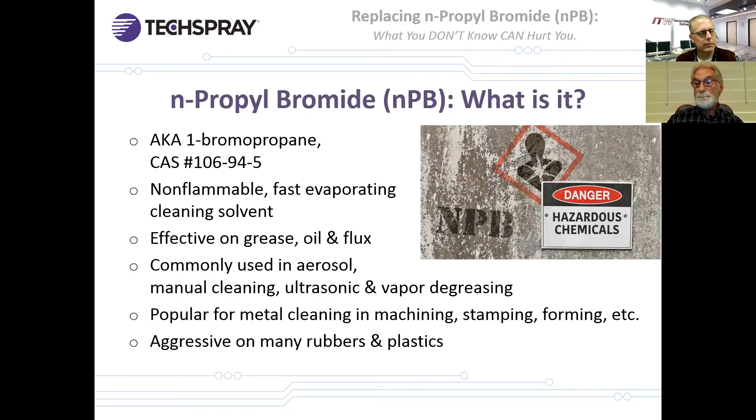Okay, so why do people use nPB? Well, a little history. About 30 years ago or so, Freon 113 or CFC 113 was used everywhere, and it cleaned everything. It was non-flammable, plastic safe, and it was a very powerful cleaner. As time went on, they also found, unfortunately, that it depleted the ozone, which was a big deal a number of years ago. And so the CFCs, or the chlorofluorocarbons, as a class, were the first group to be listed as ozone depleting substances by the EPA. And the CFCs were therefore banned and prohibited from use in 1994.

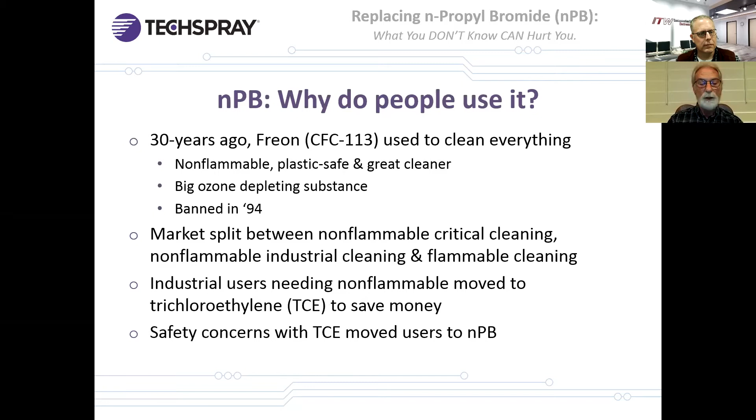At that point, the market split. It split into non-flammable critical cleaning, non-flammable industrial cleaning segments, and of course the flammable cleaning areas. The non-flammable industrial users eventually made the move to TCE down the road due to cost. And then later on, many of these TCE users switched to N-propyl bromide due to the safety and environmental issues that were then known to be associated with TCE.

Okay, problems did emerge with nPB. In 2007, the EPA approved nPB with certain use conditions for metal cleaning, electronic cleaning, and precision cleaning. These were under the SNAP rules. If you're not familiar with SNAP, it's actually a caveat of the Clean Air Act, and it stands for the Significant New Alternatives Policy Program.

So, as with most things, the more we use it, the more we learn about it, and nPB was no exception. It was widely marketed as a safety solvent, and it was used in almost every imaginable type of cleaning method. Now, as time went on, further studies showed it to be a carcinogen or a potential carcinogen, along with negative effects on neurological and some reproductive systems.

Now, back in the day, it was somewhat common to hear complaints ranging from headaches to short-term memory loss to motor function degradation over the short term. And this was seen to be very common in vapor degreasing operations, as well as many adhesive applications where they used nPB as a carrier solvent.

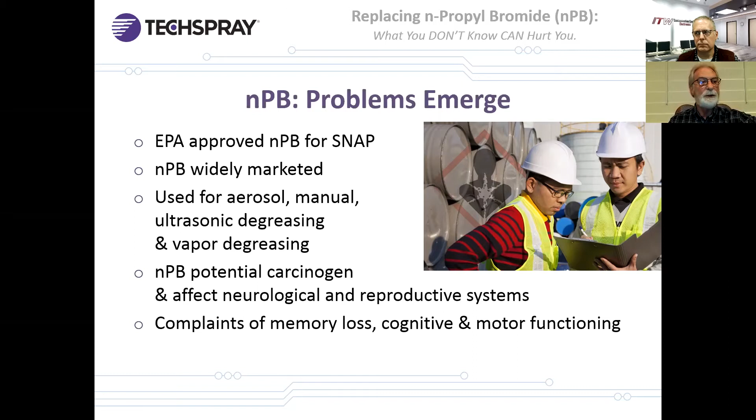Okay, let's learn a little bit about toxicity and how that toxicity is expressed in the different forms of documentation that you'll see. On an SDS, the safety data sheet, you'll see a variety of abbreviations: OEL, PEL, REL, TLV, TWA, OSHA, ACGIH. Don't let all these abbreviations scare you. There's a ton of agencies that study these materials and express the limits with different nomenclatures. And we'll go over some of these shortly.

OEL is occupational exposure limit. PEL is permissible exposure limit. Essentially the same, different agencies just use different abbreviations to express that. REL is recommended exposure limit. You'll see that mostly by the manufacturer of the products in the absence of other data, especially when the product is new to the market. They will put their own recommended limits on it.

TLV, threshold limit value, that's the top limit that you cannot exceed. TWA is a time-weighted average. That's usually for an 8-hour period, which coincidentally is the usual length of a work shift.

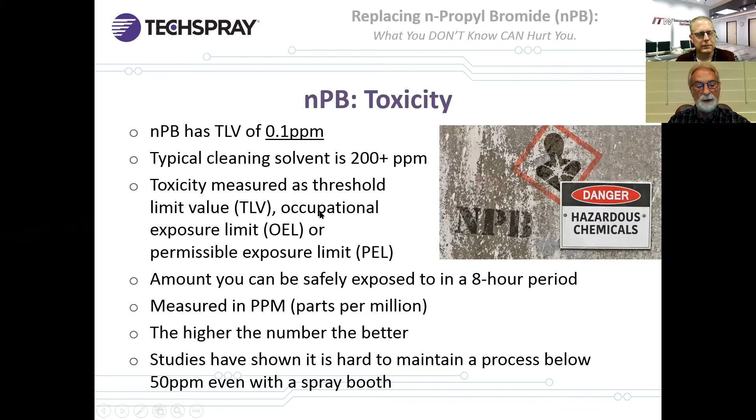But what about that last bullet, though? That actually is an important one. Well, yeah. In many of the processes by regulation, and especially in different state regulations, it's hard to get down and maintain your process below 50 parts per million, even with vent hoods, spray booths with extreme ventilation. So if the limit or recommended limit is 0.1 ppm, and you can't even maintain 50 ppm, then you're probably way out of bounds for your operators and any bystanders. Sorry, I skipped that part.

Oh, no problem. Okay. Now, as I said, this may all change very soon. In August of this past year, the EPA released a non-technical risk evaluation of N-propyl bromide in various applications. They evaluated nPB in 25 different use conditions. And out of that 25, they found 16 different specific use conditions where nPB was used that presents an unreasonable risk of injury. Not my words, that's their words, an unreasonable risk of injury.

So now they further separated these into 9 industrial and commercial uses and 7 consumer uses. Now, among all of these industrial and commercial uses of nPB, there's just common cleaning and degreasing methods, including vapor degreasing like open top, inline, closed loop systems, cold cleaning methods, and aerosol uses. Automotive degreasers such as engine degreasers and brake cleaners containing nPB were also among this list. And the list goes on. It's a pretty significant list.

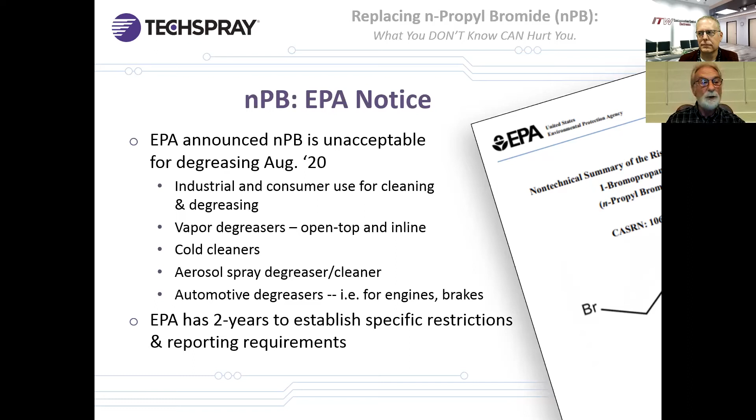So just my guess, and this is just me talking off the cuff, my guess is that once this happens, you're going to see some revision of the SNAP rules and the restrictions on the use conditions regarding nPB, and perhaps even some modification of the Clean Air Act itself. So that may be coming within the next 2 years. Okay.

Okay, so where do you go from here? Are you considering replacing nPB in some of your processes? How are you going to set up the evaluation and that decision-making process when you're looking at a variety of replacement chemistries? Well, hey, you're in luck. We're going to give you some guidelines based on our experience on how to go about this.

Now, you may find that you need to modify our techniques and recommendations somewhat to fit your specific process and situation, and that's okay. But what follows are the guidelines that we employ, and they just may not be right for everyone, but it will give you an idea of how to organize your procedures.

So what are the target parameters that you want to consider for evaluation? Well, some of these include just what's listed here. The method of application, toxicity and emission values, the flammability of the product, materials compatibility, other specifications that you come up with that you need to review and evaluate, and of course, performance. And last but not least, cost. Cost will always be a factor.

Now, this may or may not be your primary concern, but it is our suggestion that you consider cost lastly. And the only reason I say that is because we've seen a number of times where a customer, during his evaluation process, has written off a number of competing products just due to cost. Well, eventually they find themselves boxed into a corner with no replacement chemistries.

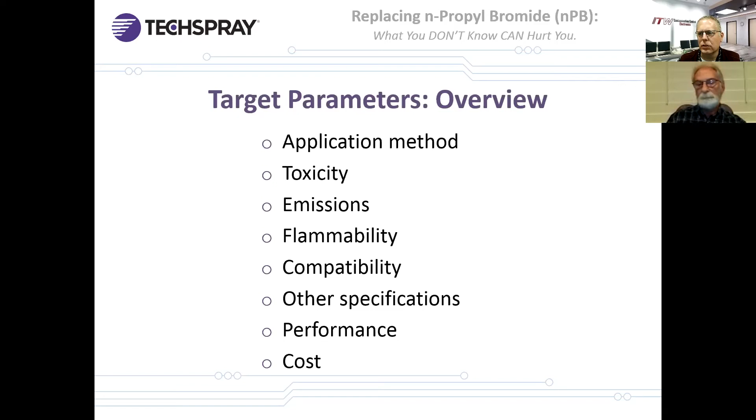Okay, so starting out, hopefully you can see that. Okay, so we've got a form here. Piers, can you see that? Yes. Okay, just making sure.

So you have a form here. It's a specification form. The idea here is you get with your chemical supplier, let's say your current chemical supplier, and you need to get the specs of what you're currently using unless you have that already. And the key to this is you go to either your current supplier or other suppliers. They need to understand what you're currently using. That's the default, sort of the baseline that they're going to be going off of.

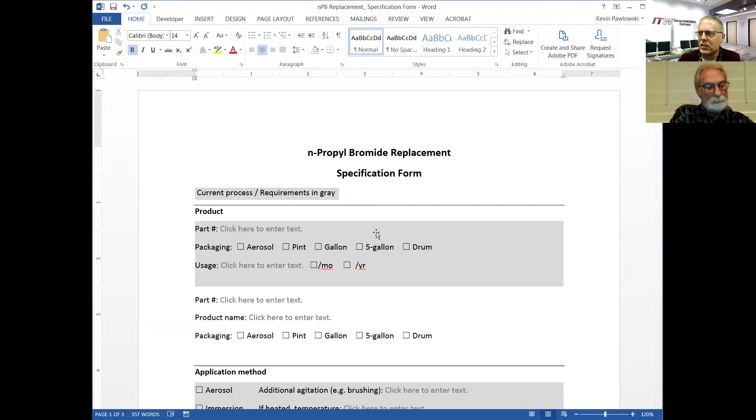And so this form gives you a way to do that without playing 20 questions, going back and forth 20 times before you finally get to it. So you can get this to your current chemical supplier, have them fill out the gray areas. So that is your current specifications. And then you send it to another chemical supplier. Let's say you send it to us. We look at it and, okay, here is what you're using in terms of your product.

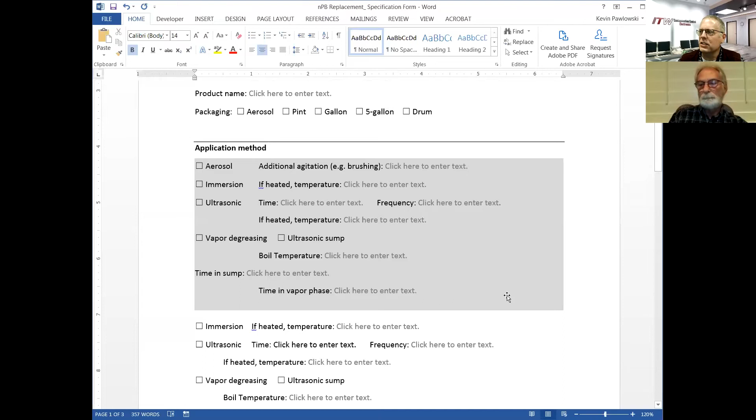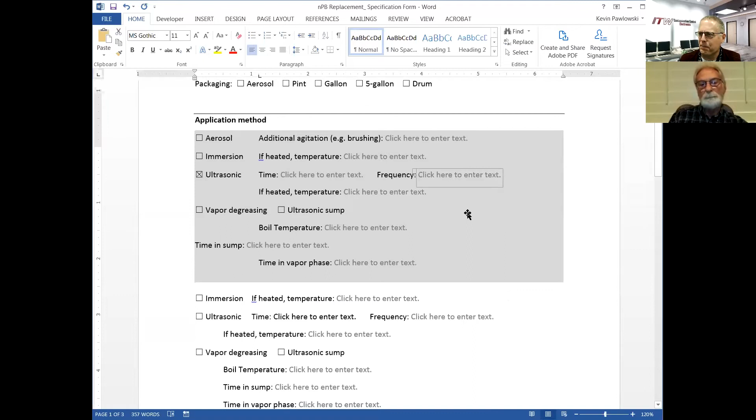Application method. The more we can understand, we may have other questions, but this will give us a good base information of what we're dealing with. And so what does your process look like? Well, here's some fill in the blanks. You can check things off and you can fill things in to make it really easy then for somebody to get back to you.

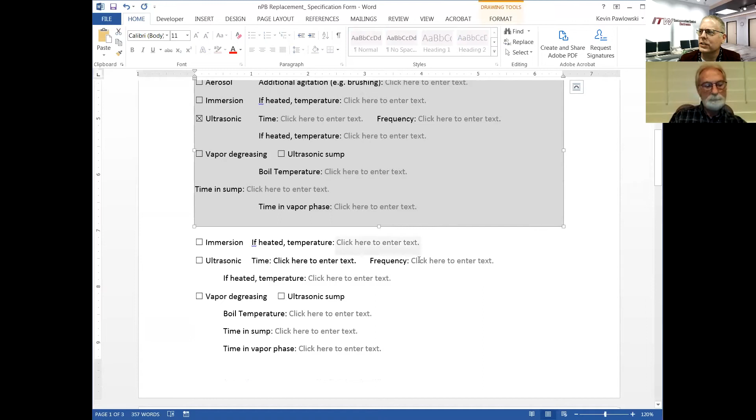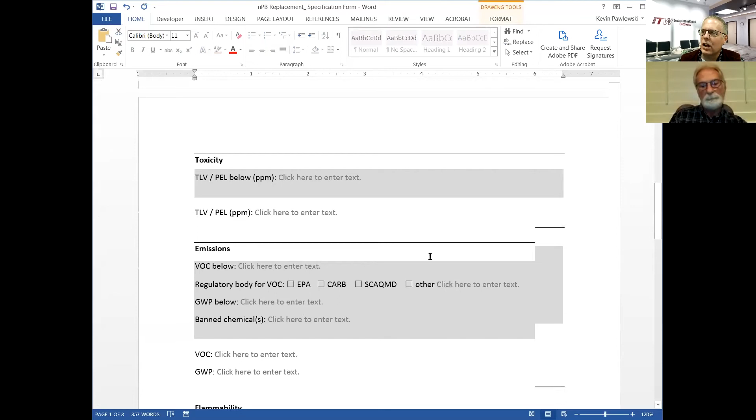Then have the supplier fill in the part in white. So you're going to supply them what's in gray, they fill in what's in white, and then when you're done, you've got their recommendations. So you can see it goes down to toxicity. It happens to follow the slide Piers just went through. So we're going to be taking you through step by step on that. And of course, ending in cost.

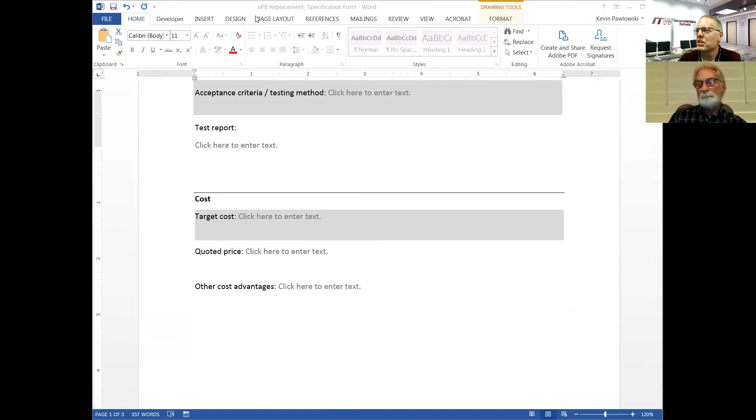And there is the opportunity to add other cost advantages because, as we all know, it's not always just dollars and cents. So then you get these back, let's say from 3 different suppliers. Then what you have is a worksheet. The worksheet is an Excel spreadsheet.

Okay, so most of you will know how to use Excel. You can make changes as needed. Add the product names that you want to add, fill in the blanks from the forms. And this will give you an opportunity to do a comparison study. So you've got all of these specifications across, and you can see them side by side, so you can decide which one works best for you.

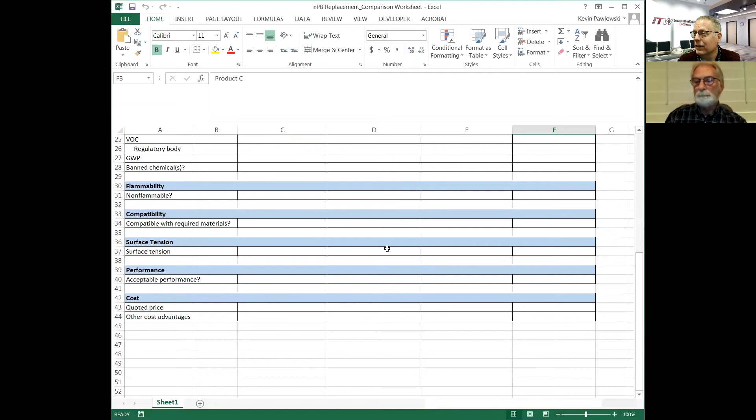So as Piers mentioned, you look at the quoted price. You can go to the lowest one as long as everything meets your acceptance criteria. So this column C is your current product, and if everything meets the same specifications, well, it should work in your process. So the idea is to really slick up the communication with your chemical suppliers. Okay, so let me get this back to the slide.

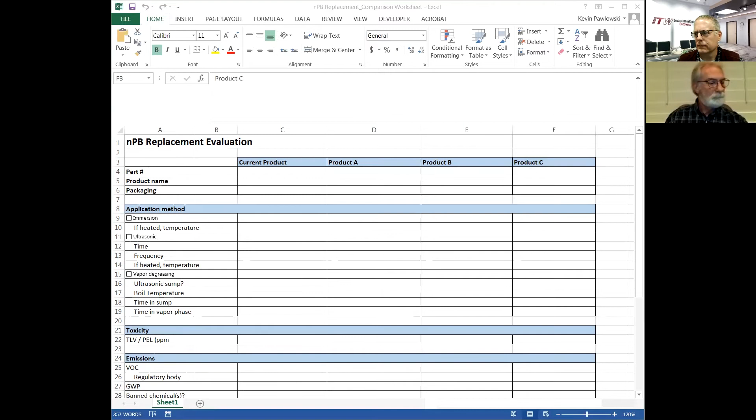All right, Piers, back to you. Okay. Just one second. Sorry. That's okay. Jumped ahead a little bit. All right. Okay, here we go.

Okay, so let's look at the various application methods that you may be currently using. Now, each of the replacement products that you're considering are going to have their own pros and cons, depending on how you employ those products. So here's a few things to consider on each, and we'll dive a little bit deeper on each one of these in the following sections.

So for vapor degreasing, you want to compare the various physical properties of the competing products. What are the different boiling points? How will these different boiling points help to remove the soils? Because you'll notice that in many of the ones, the newer formulas are typically going to be lower boiling points than nPB and some of the older methods.

What type of retrofit may be required for the new chemistry? Is the unit on its last legs? Is it worn out? Is it time for replacement? Is your unit compliant with the regulations in your state for all of the emission controls? You know, this could be the right time to either repair or replace your unit.

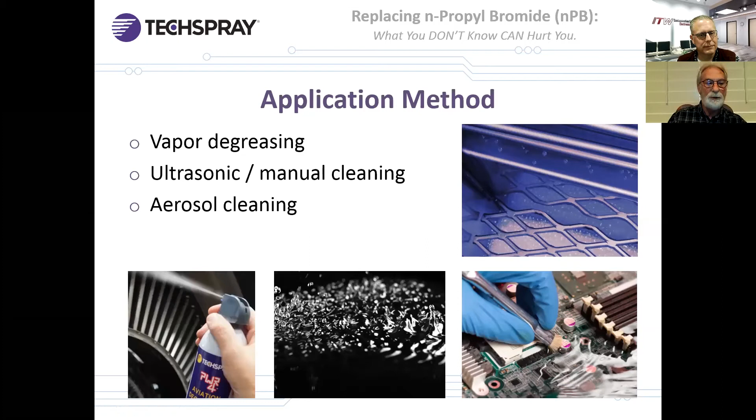Okay, now to go a little bit deeper into vapor degreasing. If you're not familiar with the process, and obviously a number of you are, but for those of you that are not, it's a closed loop system. Essentially it's a boil, reflux, and condensation loop that regenerates or condenses that solvent and then replenishes the section that provides the cleaning area, which in this case is the boil zone.

Now, the solvent chemistry should be an azeotrope or a near azeotrope in order to maintain constant or nearly constant composition and stability in both the liquid and the vapor phases. This is, number one, for safety and consistency in cleaning. For the typical application, non-flammable products should always be used in a vapor degreaser.

Now, compared to your current products, the boiling point will probably change in your replacement chemistries that are under consideration. In the newer chemistries that we typically see, the boiling points are generally lower. When switching to a new chemistry, it will be important to optimize your system to achieve the best performance values and to meet your cleaning requirements.

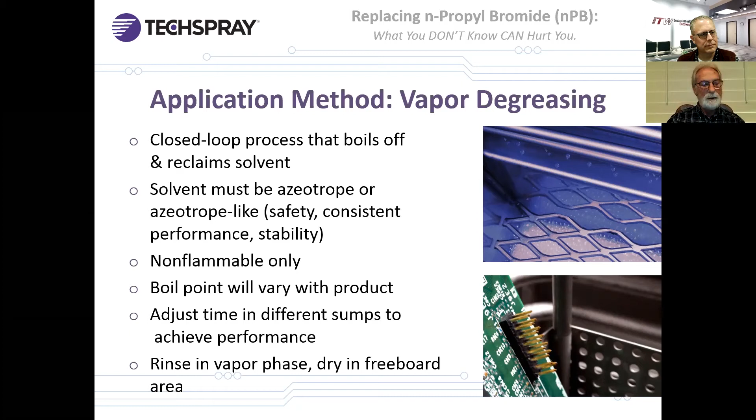So for ultrasonic cleaning now. For ultrasonics, we always recommend, again, using non-flammable solvents due to the possibility of emission escape that's really almost inherent in these types of units. Flammable emissions or vapors can escape, move around the area, and potentially come in contact with a heat source or an electrical source and cause ignition.

So for various chemistries that you've got under evaluation, you want to vary the dwell time in your testing. That way you can see the different results, and that will help you to optimize that process for the maximum cleaning performance and your throughput.

Adjusting the frequency usually is only going to be feasible by changing the model of the unit and/or its transducer. It's going to be much more difficult to change the transducer. It's really not an option. It can be done, but to safely and reliably change out the frequency, it's just easier to purchase a new model with a correct transducer in it.

You can consult with your equipment vendor, explain the parts that you're cleaning, as well as the chemistry that you're using, and they can help you choose the right transducer option or a different model with a different transducer option, as well as the capacities that you need for your process.

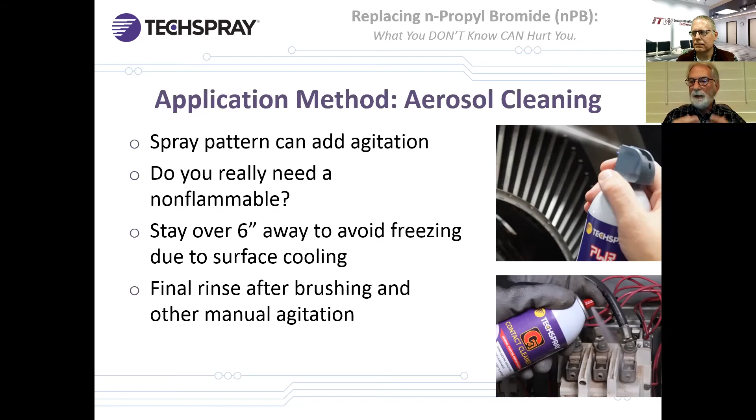So now, some aerosols come with a brush attachment. If you're using the brush attachment with the aerosol or some other method of outside agitation, like a separate technical brush that you're using to loosen the soils, a final rinse again is always recommended, because when you're using a brush, you may be dislodging the soils and dissolving them, but you're really just moving them around from point A to point B. You're not getting them off the board. Once you've got everything loosened up and you're pleased with how it's looking, rinse that board or that part from top to bottom with the aerosol, and that will give you a final rinse of everything off of that board.

Hey, Pierce, I'm just going to give you a 10-minute warning on it, okay? Okay.

Toxicity. First, we recommend to avoid TCE, or trichloroethylene, and perchloroethylene, or PERC. Both of these have use restrictions. That's going to affect your reviews and the process that you're organizing for these comparisons. So it's always a good idea to review the SDS, your technical documents for the products that you have under evaluation, for the various limit values that are going to affect your operations.

Replacement chemistries, we recommend those to be in the 200 plus parts per million threshold limit value, based obviously on an 8-hour time weighted average. So consulting with your ESH group is always a plus, because you don't want to go through all of this testing and then you've made your decision and then your ESH guy comes up and goes, wait a minute, we can't use this. So avoid hiccups like that. Keep your ESH team in the loop.

Now, if you feel it's necessary, you can employ an industrial hygienist to do some exposure testing while you're doing your performance evaluations. That will give you some real world idea of the amount of material that you're putting into that facility and the risks involved in the new products compared to your older products before you make that decision.

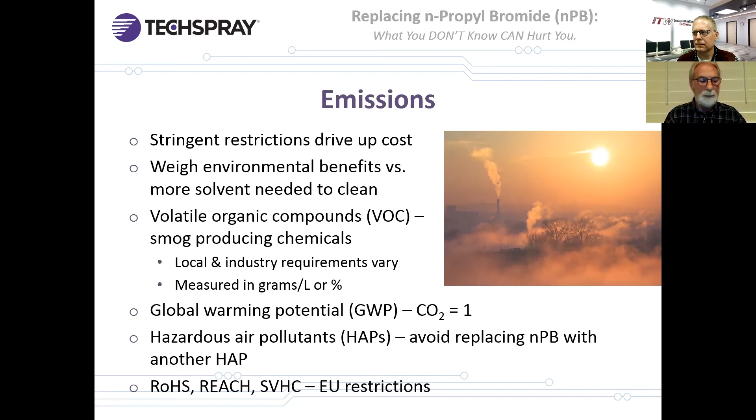Flammability. Okay, so to reiterate, making a product non-flammable results in a premium cost to the customer. So is that required or just desired? So except for extremely special operations, vapor degreasing, and normally ultrasonic cleaning, non-flammable products should always be used, and both of those are due to safety reasons. So consult with your product and your equipment vendors, as well as your safety team.

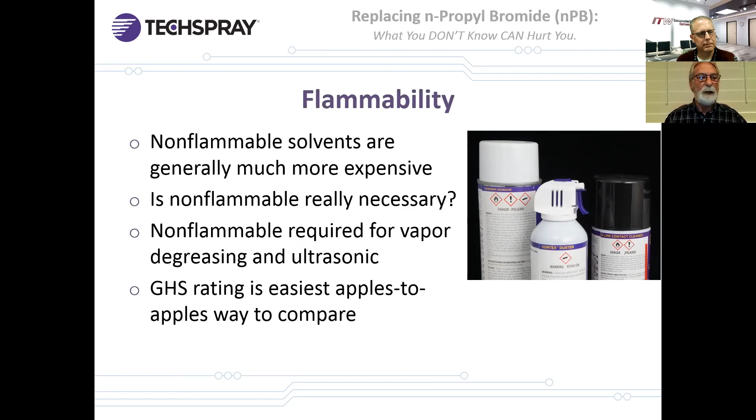Another way to compare and contrast the flammability values when doing your reviews is the GHS flammability rating that's available on the SDS documents.

Materials compatibility. If you're replacing one product with another, it's always a good idea to run compatibility on your various plastics, seals, O-rings, to ensure that there's no degradation by the new product or changes that you may have made in your process. Plastics can haze, craze, crack, dissolve. Elastomers and seals can swell, shrink, get soft, sticky. They can even be made brittle because the plasticizers leach out.

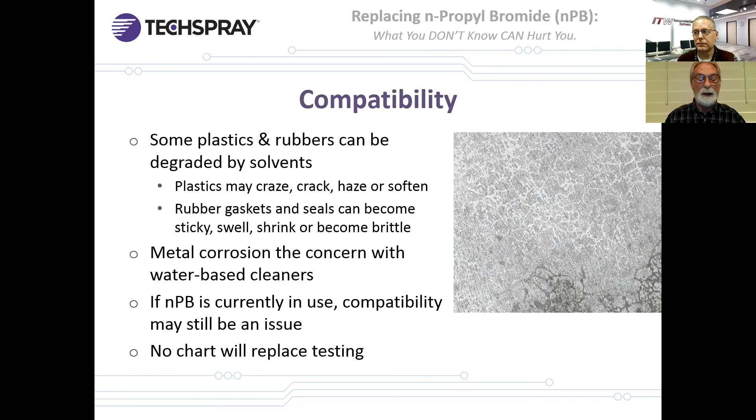If you're using a water-based product, be aware that corrosion can form from inadequate product rinsing or incomplete drying on the parts. Now, your chemistry provider can give you a good idea of what materials may be affected by the product, but testing is the only way to make that determination, and we can help you with that also. Oh, I'm sorry, the other specifications.

These are the boiling point. That's most commonly used to set up a vapor degreaser. You'll need to change a lot of your settings, and that's going to determine what these settings may be. Higher boiling point actually can help remove waxes and the waxier, heavier greases. Surface tension is another physical property that you might want to look at. That allows the solvent to flow under some of these low standoff components, in and out of weep holes on certain parts. So that's an important property.

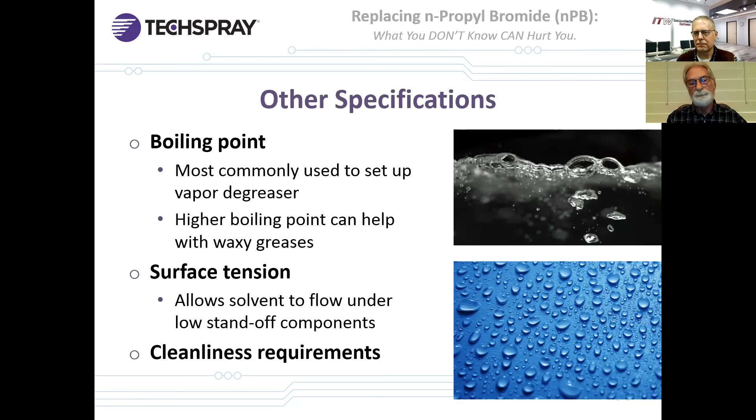The cleanliness requirements, whether that be a military performance specification or an internal SOP, could be customer driven. It could be an IPC specification like J-STD-001, A-610, whatever it is, document that and make sure that you're comparing all of these products to the same specification. Okay, performance. When you're doing performance testing, you'll need to establish, again, what cleaning criteria and requirements are necessary. And so, like I said, document all of this.

Generally, the variables that you're going to see in your solvent evaluation are solvency of the product, differences between your products and solvency, and the things that you can control, such as time, temperature, and agitation, if you have agitation like ultrasonics in your vapor degreaser. Depending on the type of product, we recommend starting with the current parameters if possible. And your provider can also give you some starting points based on their own product knowledge. For instance, in a vapor degreaser, settings on the unit will need to be adjusted to the new product.

When doing the performance testing, you'll probably need to adjust your zone times, the dwell times in your different zones, and the number of cycles will need to be determined. If it's allowed, your wand use and your ultrasonics parameters will also need to be established. Now, the chemistry provider can generally help with the setup and the performance testing ahead of time, and that can give you a good idea of where to start. And that'll save quite a bit of time on your part, but that's in a laboratory setting.

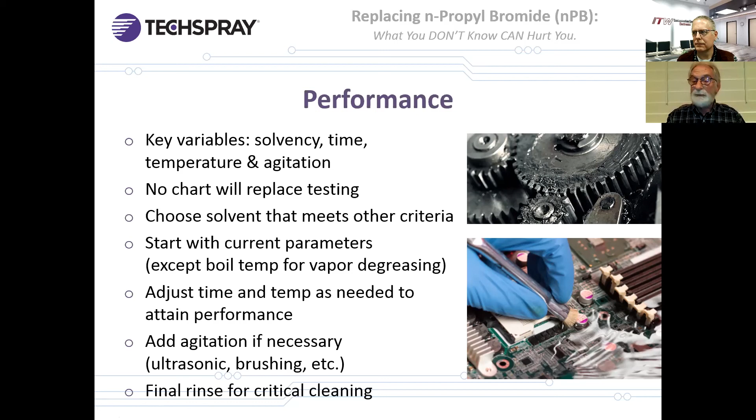So, like Pierce said, I just have a few more slides and then we'll get into the questions. So you knew it was coming, okay? We're a manufacturer of chemicals, of solvent cleaners that replace N-propyl bromide. So I've got to get into the commercial side of things, so my apologies.